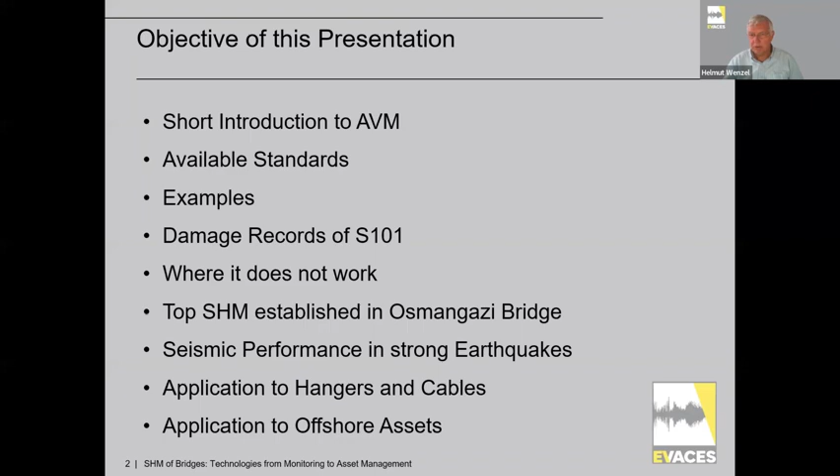Vibration-based analysis or assessment has a long history. Already in the 1850s, as far as I understand, some theoretical physicists were aware of the information that you can get from vibrations and specifically ambient vibrations. So what I want to show you today is a short introduction, very, very short, because I guess you know that. And I will have a word on available standards because this is important for practice, and then go through examples. I will talk about it as we see the slides. I'm looking forward to questions on that.

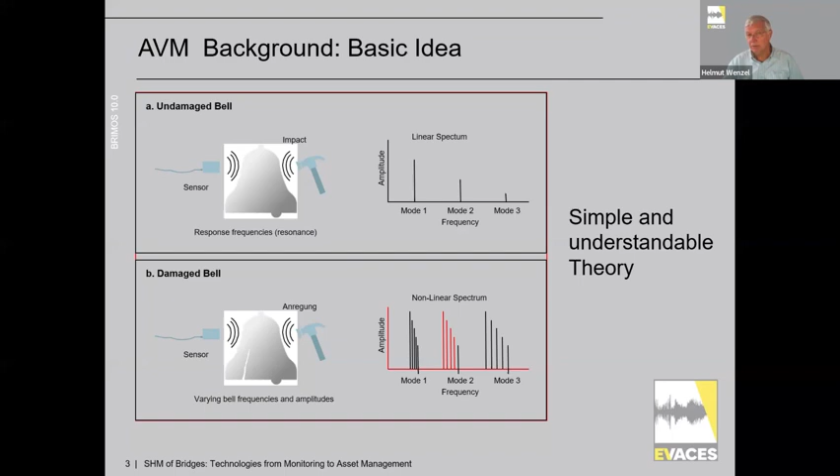The principle is very simple. The basic idea is if you have a bell, or if you don't want the bell, you can have a wine glass. If you impact it, you will get a sound back if it is a glass or a bell, but you can get vibrations which are in a linear spectrum, more or less, a very good and clear spectrum. And if it has a damage, then you see it in the spectrum you compute from your records. The rest is seen in many publications, and you can read about this very carefully.

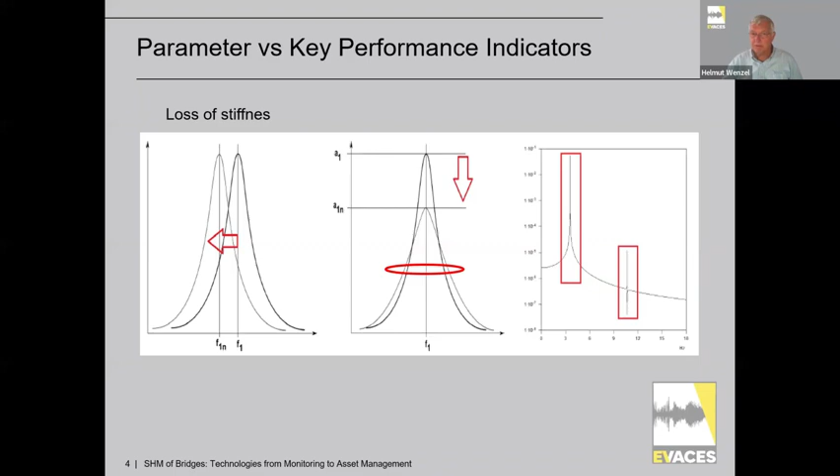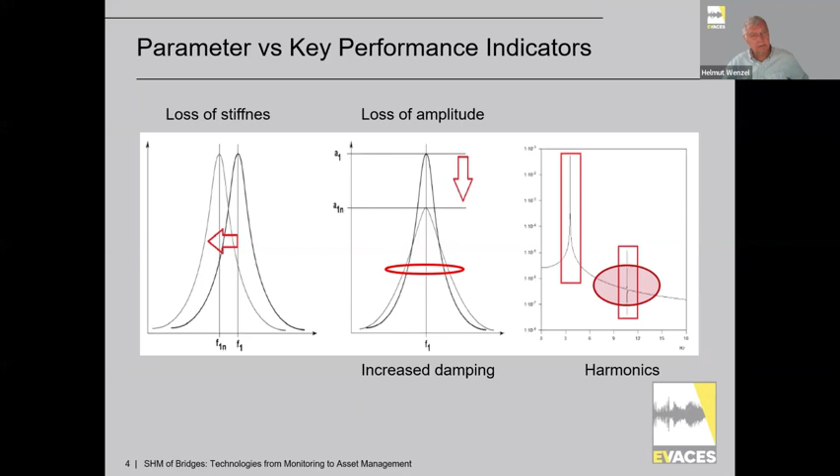We distinguish between key performance indicators, and there are only a few that are really important for us. One is the loss of stiffness, which is expressed by the reduction of the frequency. Another one is a loss of amplitude, which is more or less driven by damping. And if you look here, you see out of that you can read a lot of things. And then you have the harmonics and all the related information with that. I don't go into details of that. It will be more important to talk about some examples. We did a lot of very good experiments more or less all over the world.

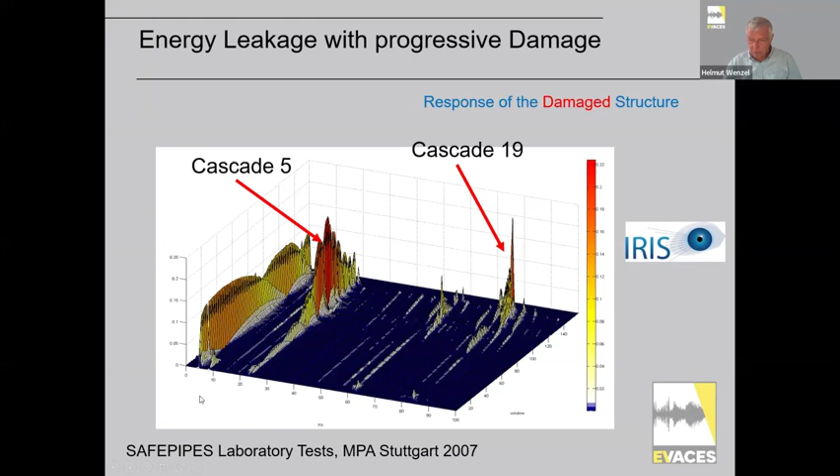This is one experiment from Stuttgart, where a pipeline used in a nuclear power plant has been excited and vibrated until it died, more or less. And what you can see here is the end of life of this pipe. On the left side, you see the frequencies when there is no damage, and then it starts to develop damage. You have a cascade 5, which means this is in the 5th mode. And later on in the 19th mode, you can see heavy excitation. So this is the indicator that there is something wrong. You can find all this in the publications about the IRIS project.

What is important is, first of all, we have to know the physics behind it and understand the science. But later on, to sell it, it is important that we have something to give to the clients, potential clients, to show that these methodologies are already well developed. And we were able also, as one of the products of the IRIS project, to bring the methodology into this Eurocode. Eurocode 16991 went into force in 2018.

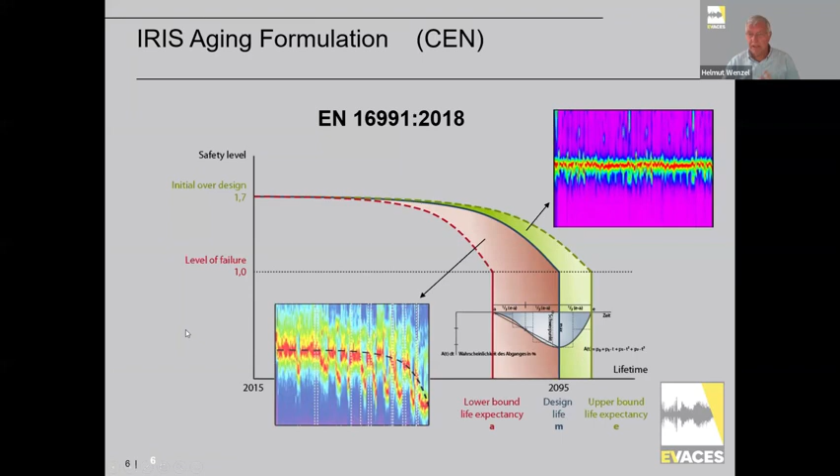And you can see if you monitor a structure, then if your record is straight like this, you are here. If your record diverts like this, it is here. These are the records from the example I've shown you before. So this is only the proof of concept. But if anybody asks you, which code are you following? Yeah, you can quote this code. This is very helpful for selling these things.

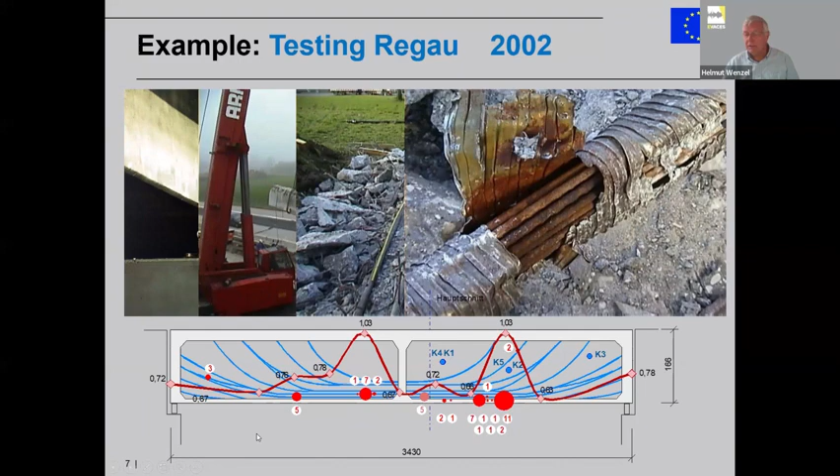Then a few key projects where we have tested structures where we knew that there are damages. So you can see the corroded post-tension cables, and here's a number of wires involved, and so on. This was a destructive test, but here in 2002 already we were able to show that even if you don't see anything, you put your sensors on the plain structure, you can find where these places are due to the indicators, as we can show in this line. Still very difficult to convince the client about it.

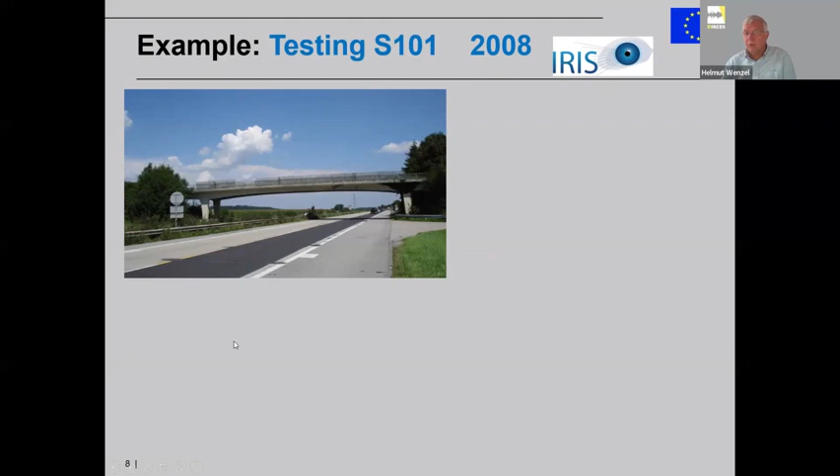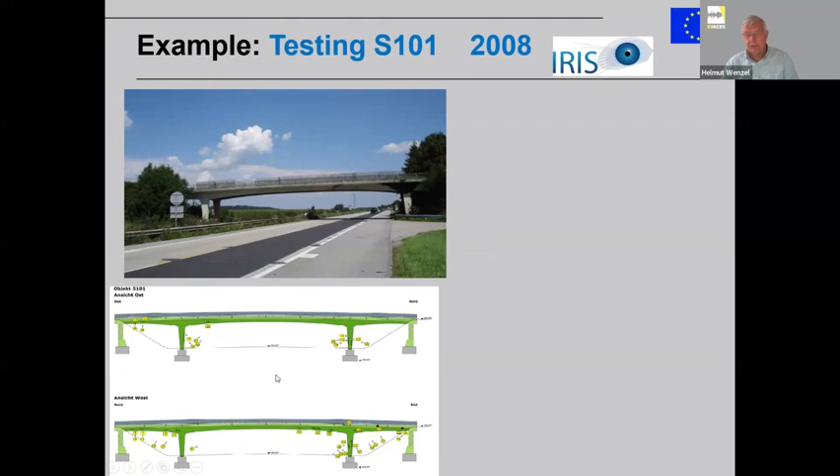And then came the S101 test in 2008 in the IRIS project. This is a bridge which was constructed in the 1960s and had to be replaced because of loading issues and other issues. A three-span frame, and this was a rare case where an owner allowed us to damage this structure artificially. And in this campaign, we got wonderful records about damages.

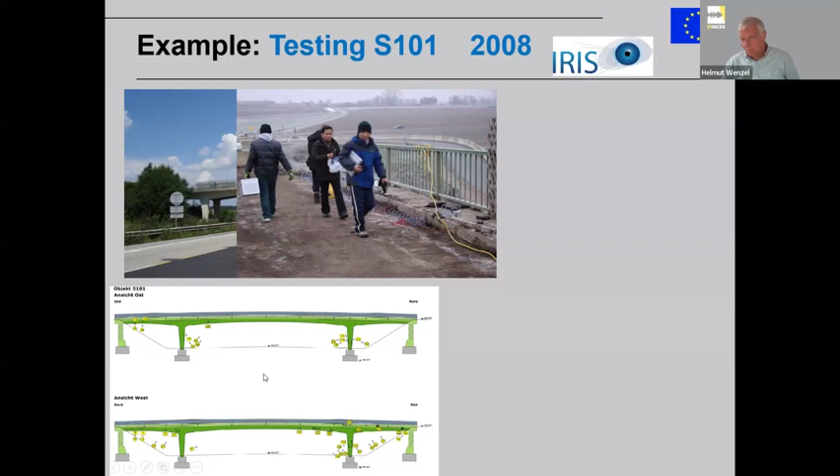For example, cut off a post-tension cable, cut off a pier here and lower it and push it up and such things. And all these cases are very well documented. You can still ask for this data. About 1,000 requests have already been made. Since then, we are still offering that free of charge to everybody. And this is more or less the record we received.

This is the structure in good condition. This is the structure with the damage of one pier. And this is a structure where we cut cable by cable until it failed. So you can have exactly these data you have here. You just let me know, and we will open it to you.

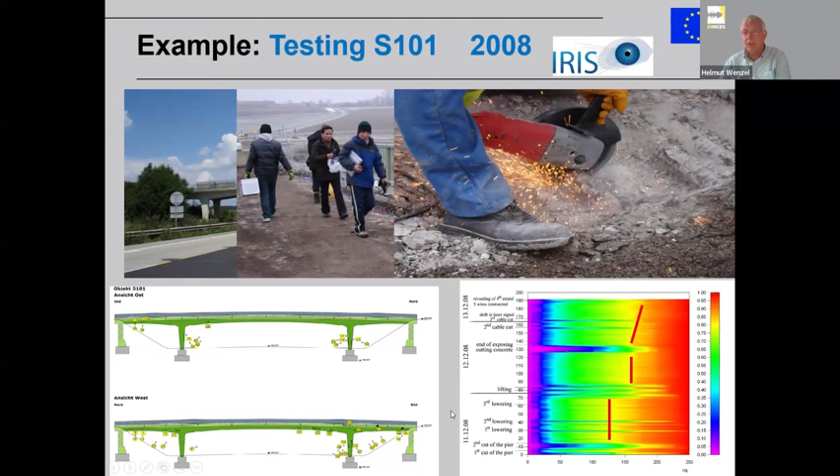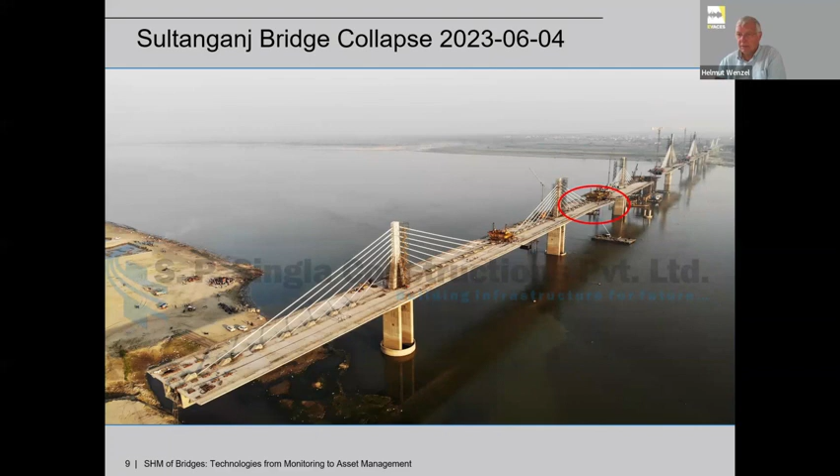Now to examples, or to things which might not work. This is a project in India where I have been involved in the cable-stayed construction here, and these are the access bridges, both sides. And what you can see here, if you look closely, is that the bridge should not deform like this. You can see a heavy lifter equipment in the beginning, and this is not a real case where ambient vibration would help you, but at least a proper monitoring would help that you do not have a deflection here of about 1 meter at 145 meter span.

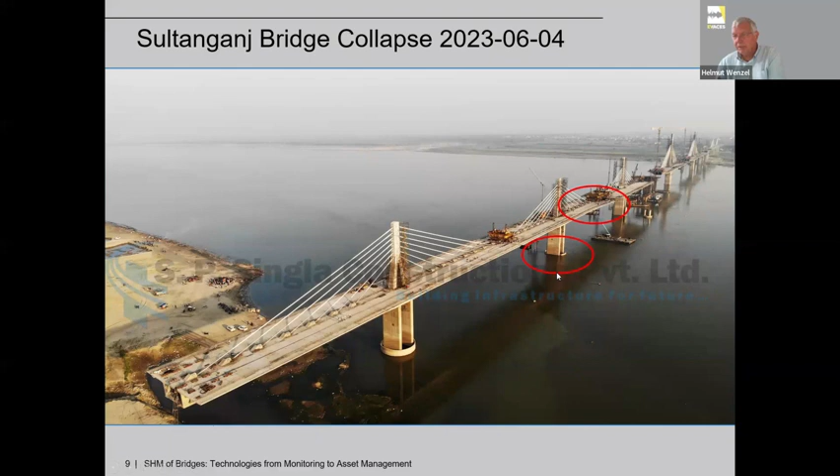And on the other side, if you look to this project, you see the ring here. This is the foundation, and the pier should be in the middle of the foundation, and it isn't. I know it's difficult to make foundations in the middle of a wide river, but if you have this, this weakens your structure. So what happened there was this.

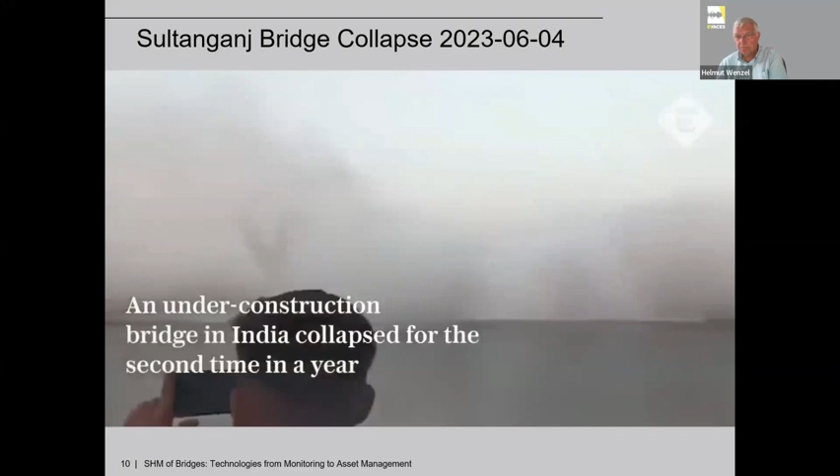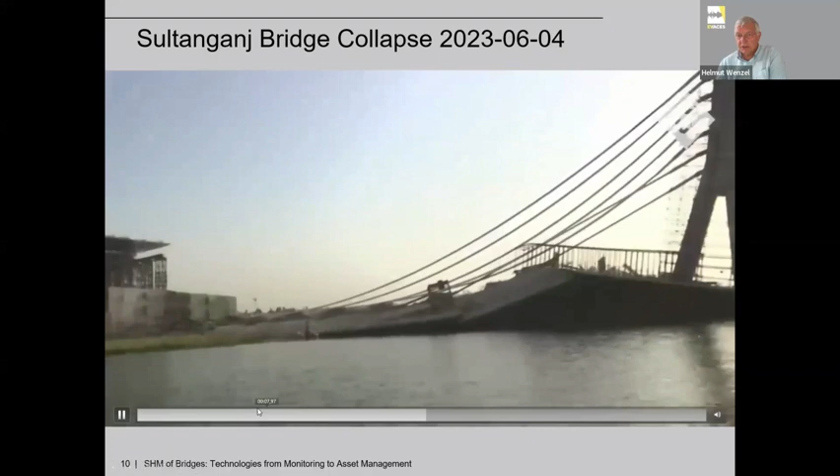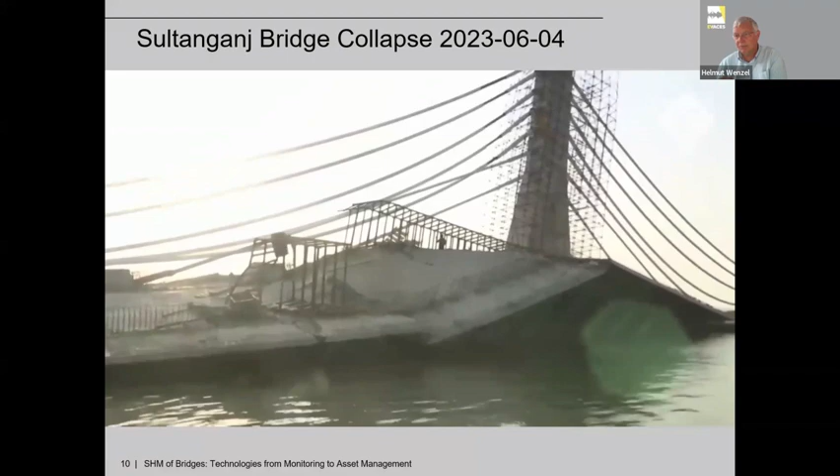The structure was not instrumented at that time. It was early morning. There was nobody on the structure. Nobody heard. One lesson learned was that most of these cases happen in the early morning because the stress from temperature differences on the structure itself is higher than anything else. So these are the good news. But what we have learned is that things like this are very well hidden, and the lessons are not learned, and there is no monitoring system to really show deflections which should be there. Of course, in the specifications you can find it, but it is rarely done.

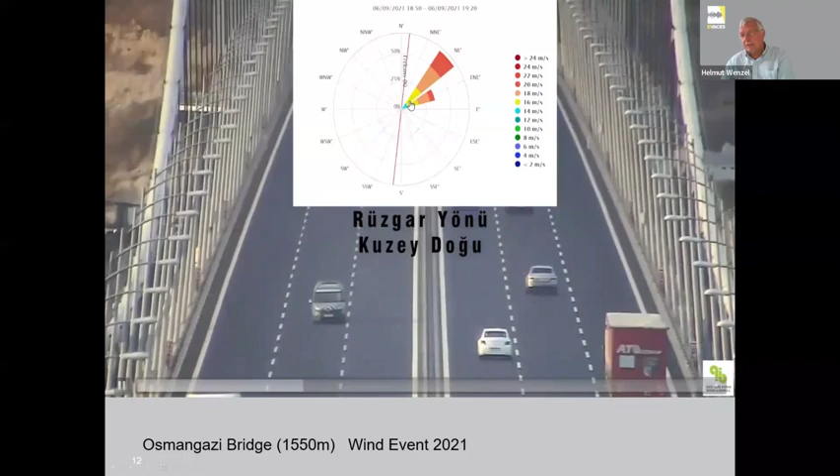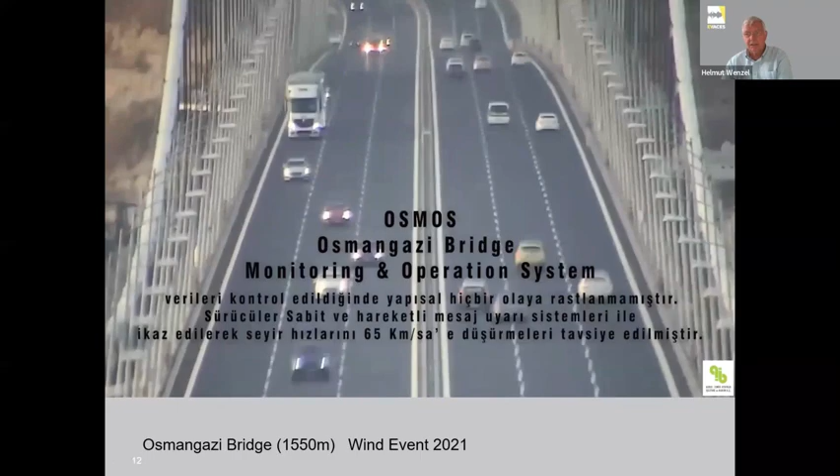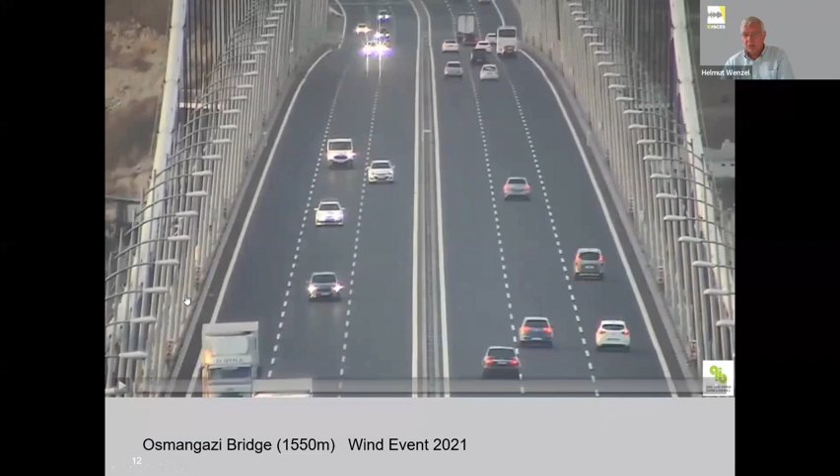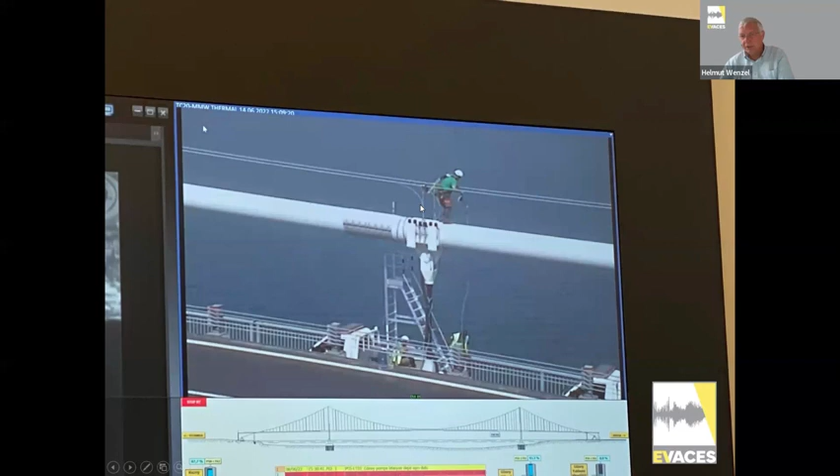So we came to analyze the structure and find out what the real behavior of the structure is under, let's say, almost normal conditions. 20 meters per second is still good for traffic, and this is of concern. So what helped here was an ambient vibration monitoring campaign. You can see here a typical Kinemetrics sensor on the cable itself to find out what the frequencies of the structure are. We did this in several places. This is from the video, also the monitoring at midspan.

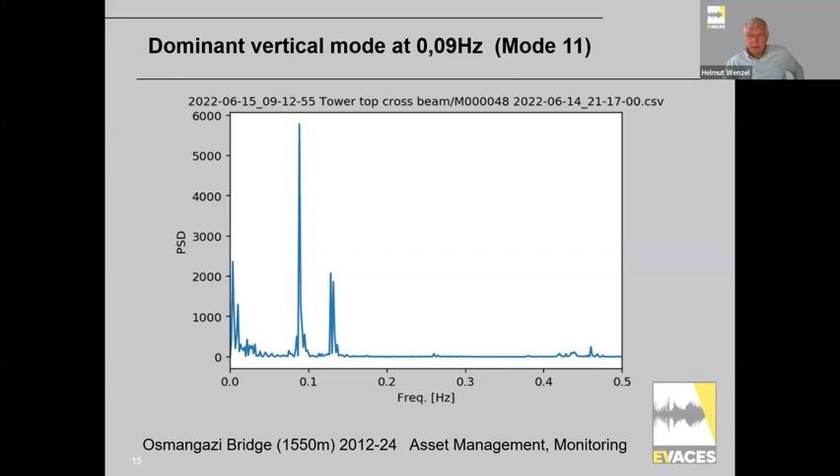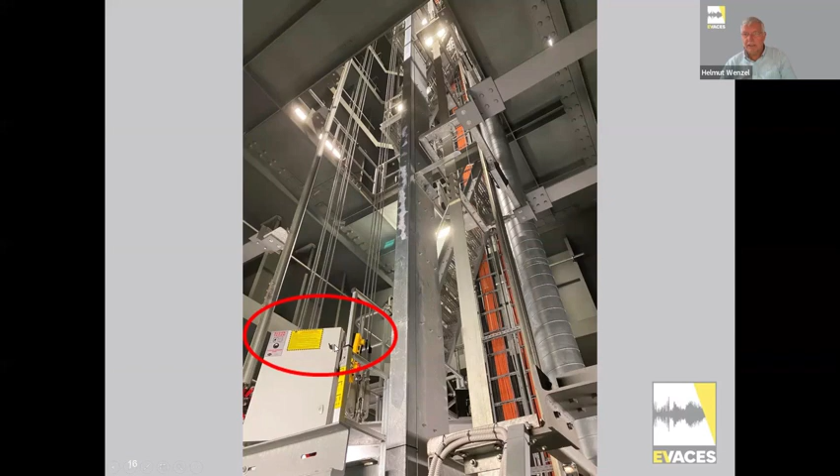Our main finding from our ambient vibration monitoring campaigns is that in almost all cases we have a major difference between design and reality. But normally it is on the safe side, so the structure is behaving better and not worse. This is inside the pylon, the huge structure. You can see the elevator, and the only damage the bridge suffered from this event was to the counterweight of the elevator. The pylon is 250 meters high, so this is a real big elevator. It was pulled out of the guides, and it destroyed some of the structures because it worked like a pendulum because of the pylon action.

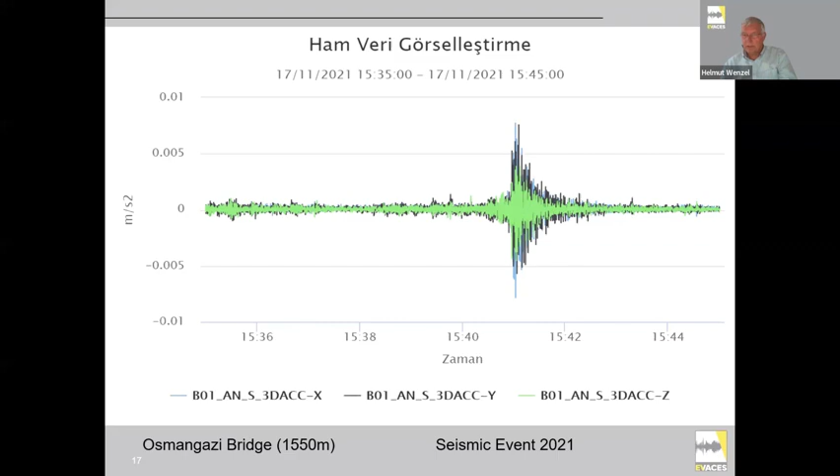This was a little bit surprising, and we also had to look into this thing. But what we found was, it is always interesting in the big bridges that you do not only do ambient vibration, but you also put some displacement sensors, particularly where you have expansion joints. And this one recorded after this small earthquake a permanent displacement. One side was the main bridge and the other side was the access bridge.

It is not critical if you look at the values, but at least you can identify weak points from that. So this is very helpful. And here we have an extremely good client who is aware of things that you cannot judge just by looking into books, but where you need some monitoring, and you have to analyze it, and then you can conclude on the consequences of events.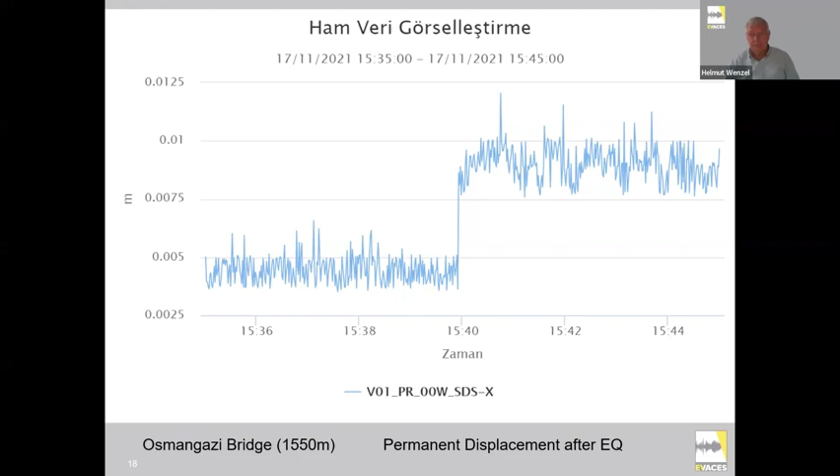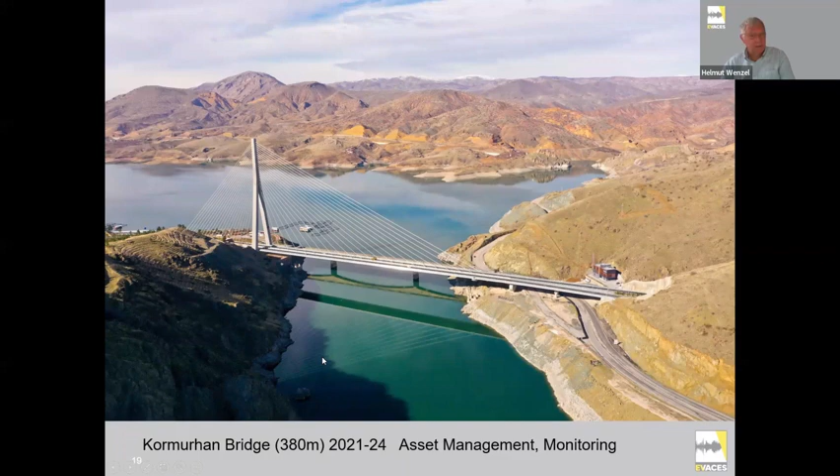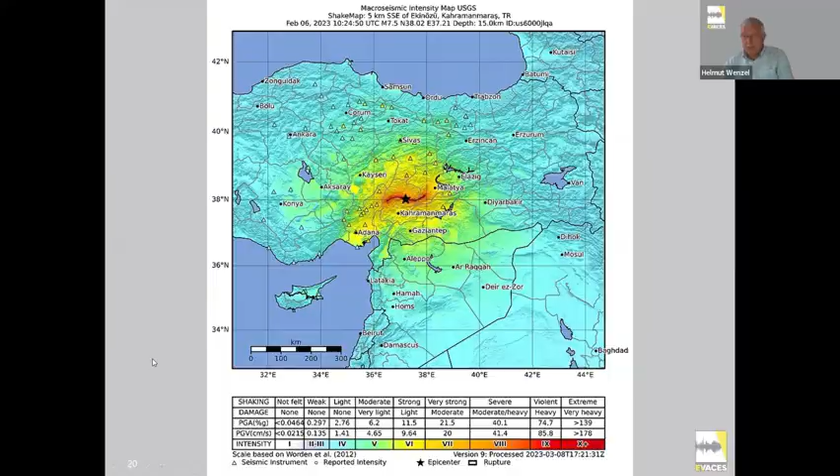And there were two earthquakes, actually, of about 7.8 and 7.5 magnitude on 6th of February 2023. This was 7.5 with this epicenter here, and the bridge is here, close to Malatya, about 150 kilometers away. And 40,000 people died in this terrible earthquake event. This is a look at the monitoring system we have installed there.

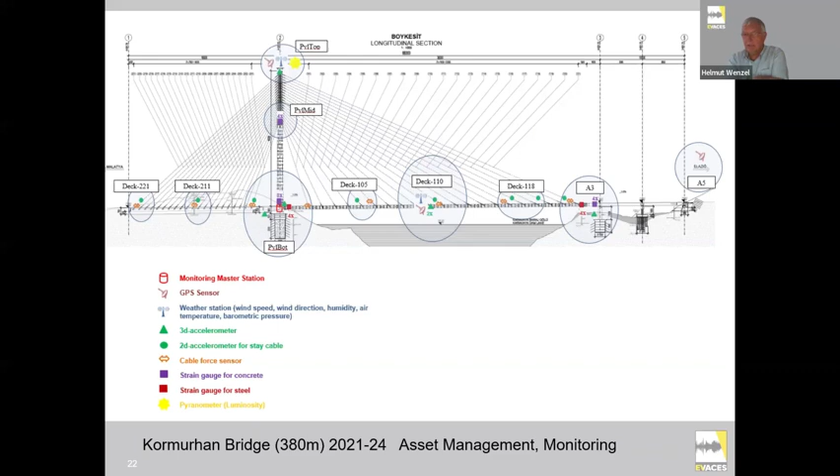So usually it is very helpful, in a first stage of monitoring, if the bridge is new and there is no doubt, you should not have a too big monitoring system. And actually, the most accurate, the most interesting information you get from ambient vibration monitoring, where you have accelerometers and a few others. Of course, you need temperature, you need the wind, and all the other things from the weather around it. And it is always advisable to have some displacement sensors where there is a movement between the structures.

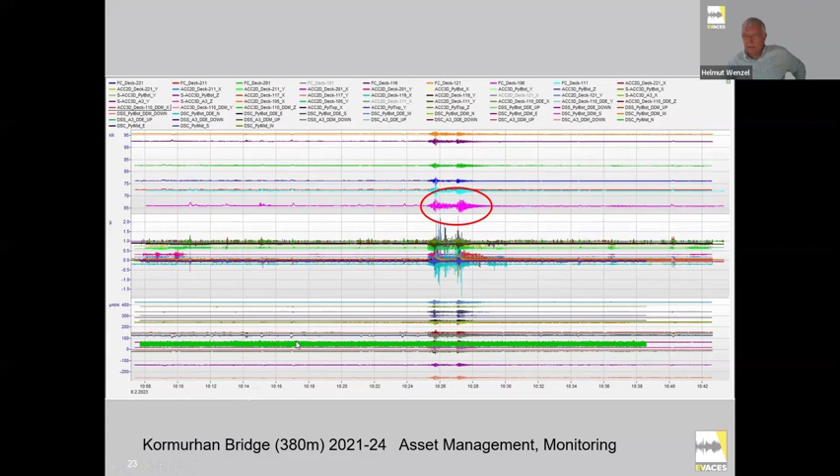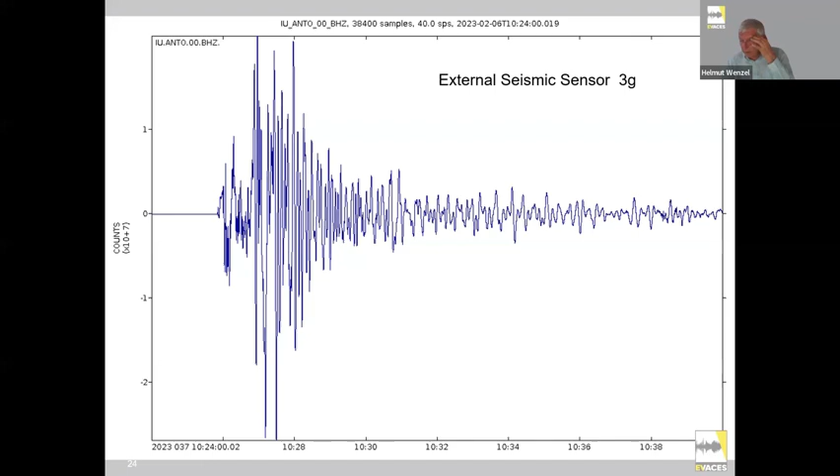And the excitation to the structure, this is a record from the nearest seismic station, and the maximum was 3G. So you can see this record. This was the start, not the full record. There was another record after that, but this is the most interesting. So 3G is something we have not seen before on the structures. Anyhow, it is obvious and also clearly understandable why bridges with long spans are not so vulnerable, and that if you have damage, then it is the smaller bridges.

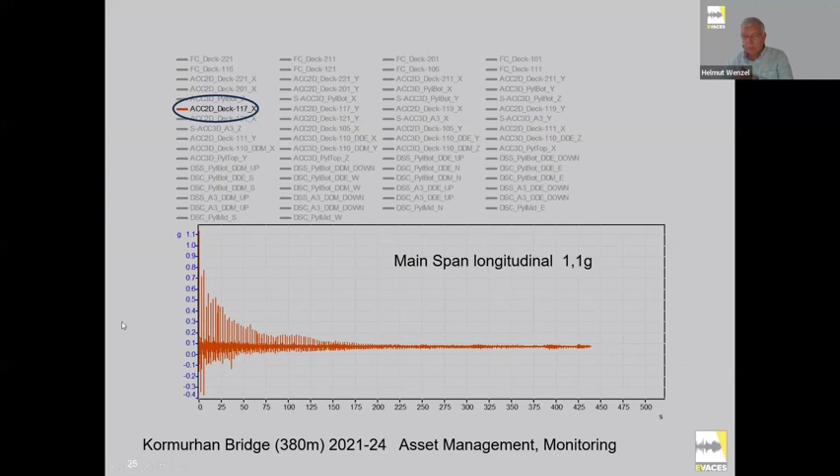Then we had to look at the deck. What did the deck do? So this is this sensor here. X means this is a longitudinal channel, and it is clear when you look at where the epicenter was that the X direction, the longitudinal direction of the structure, will be the main excited, 1.1 G. This is by far much more than the seismic design spectrum was demanding. Anyhow, there was no damage to the structure, and nothing we really had to do or change.

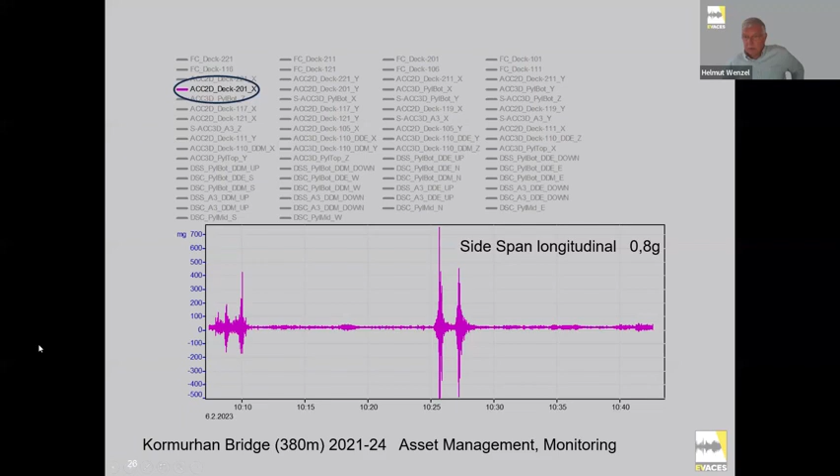The first one was the main span. The main span is a steel structure. The side span is a concrete structure. It's an asymmetric cable-stayed bridge. To balance it, you have to be more heavy in the side span, and in the side span there was still 0.8 G found in this huge concrete block, and also it is sitting on bearings, and these are seismic bearings which are able to carry that, and the bearings were not damaged. Nothing had to be exchanged.

On the main span deck, Y is a vertical acceleration, and the vertical acceleration maximum was 1.3 G, which is also much more than the code was demanding. And the bridge end is sitting on spherical bearings, and also these bearings were not damaged. Even so, we have to think that the structure must have been lifted by that.

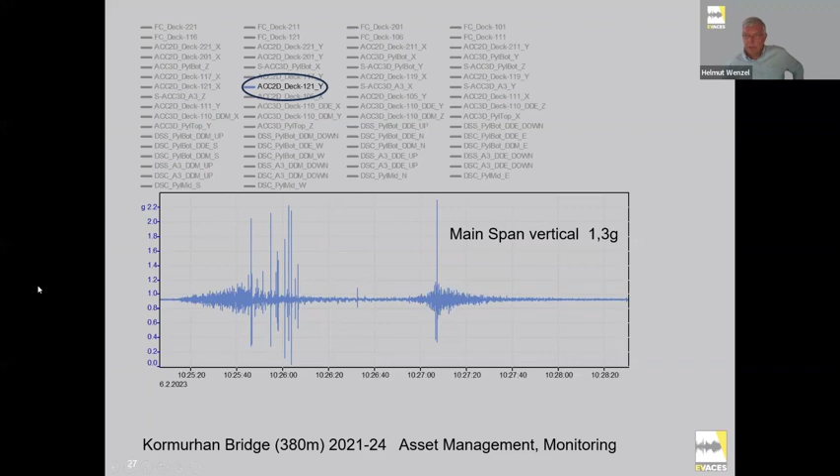But this was not the reaction of the seismic shock itself, but it was more related to the cable vibrations we have seen there. In the cables, this was a cable close to Deck 119. In X direction, so this means in longitudinal direction, it had an acceleration of 2.1 G. And you can see that there are a lot of harmonics going up and down. So we have good damping, but it is more or less running with this earthquake.

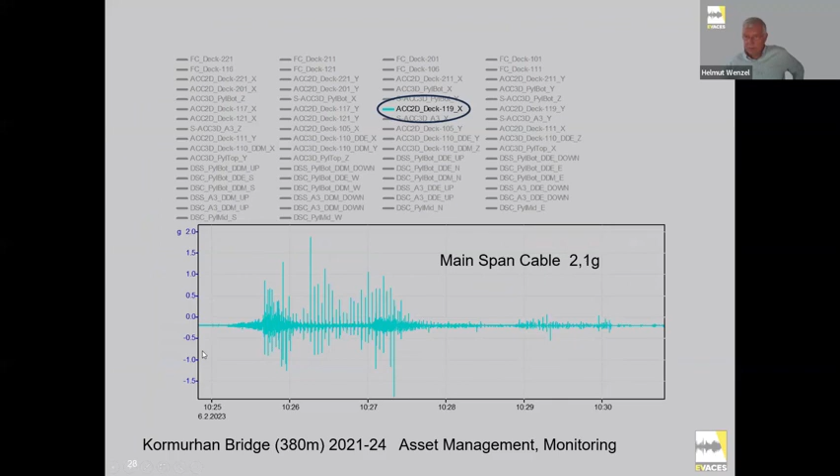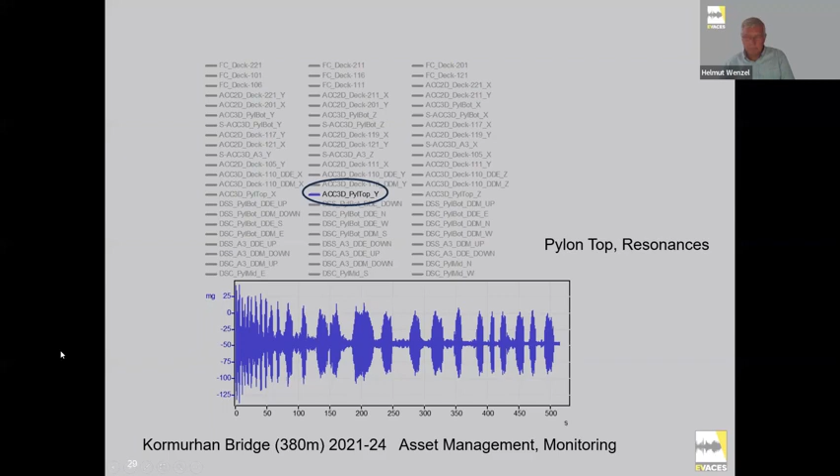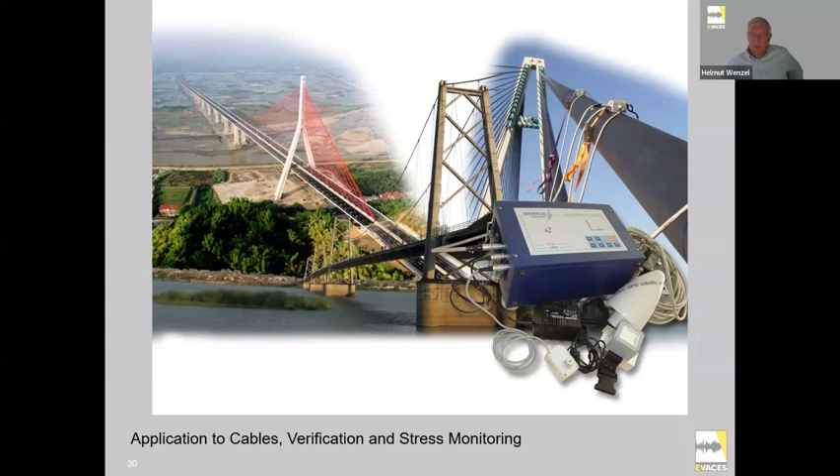So how is that done? This is a typical BRIMOS recorder on these cables. Normally it's very simple to place some sensor on the cable itself. If you want to have the cable modes also, then you need 2 sensors. And this is applied to almost 10,000 cables so far. Very reliable, very easy, and very quick to be applied. So you can find out a lot of things by that.

This example I have also shown before. I'll just give a short introduction. This is Godavari Bridge in Rajahmundry, India. This is southern India. This is a chain of 28 arches with 100 meter span each. So we have 670 something of these vertical hangers. The hangers are damaged, and some of them have lost their support.

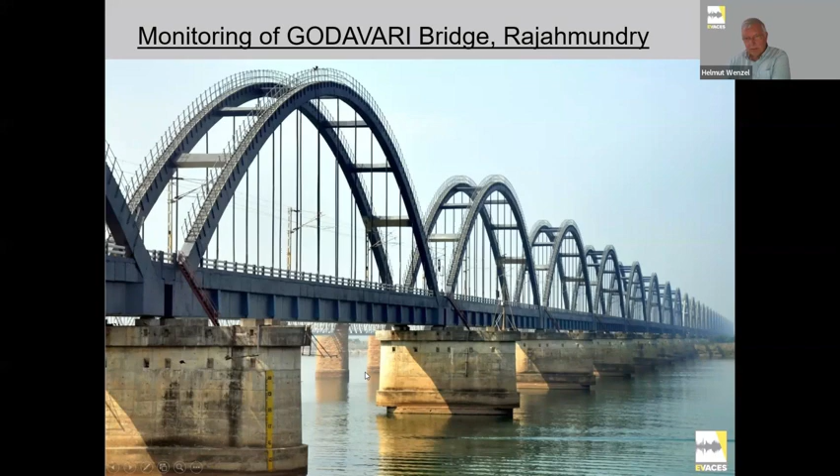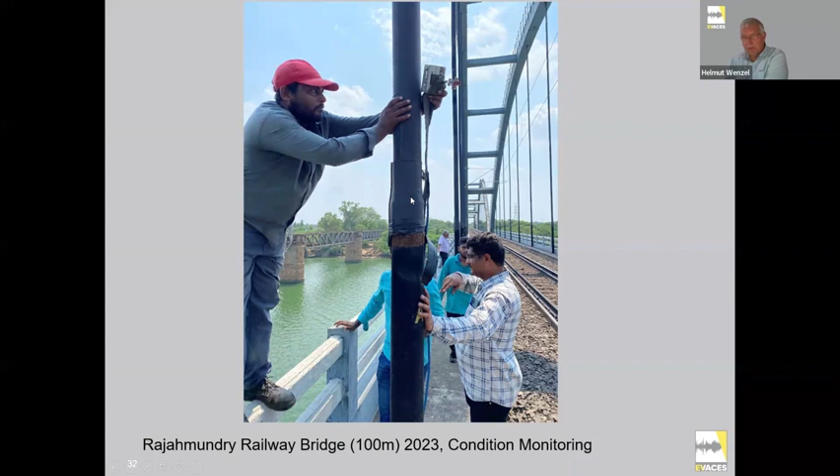So here, this is what has been done. The monitoring work can be done by local people. It's very easy to clamp a sensor here, and within 1 minute you get a record that shows you whether this hanger is working, what the force is, and what the condition is. You can see here that the condition inside of the sheath tube is not perfect.

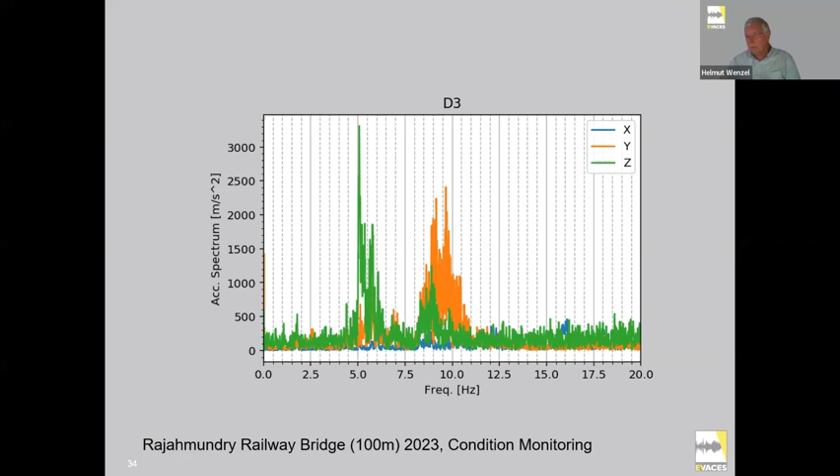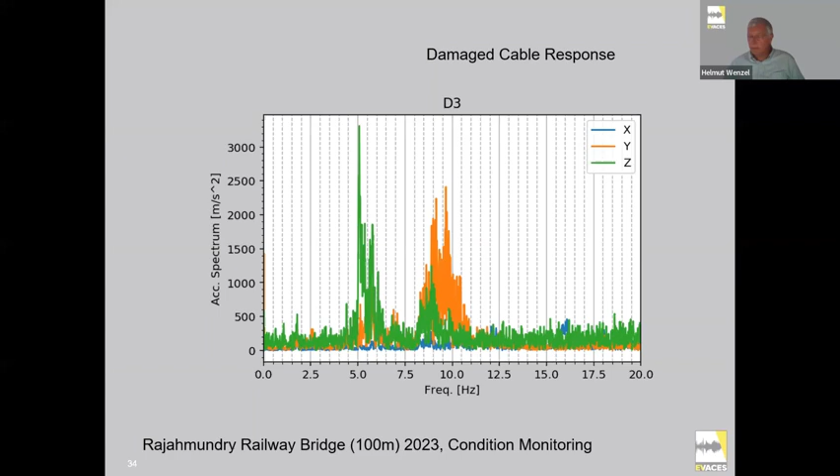In these vertical hangers, it happened that one of the hangers almost lost all of the wires. So this has been very simple. And normally we make out of that a kind of risk matrix, and show the client where the damaged cables are and in which sequence to repair them in order to avoid any problems during this repair work.

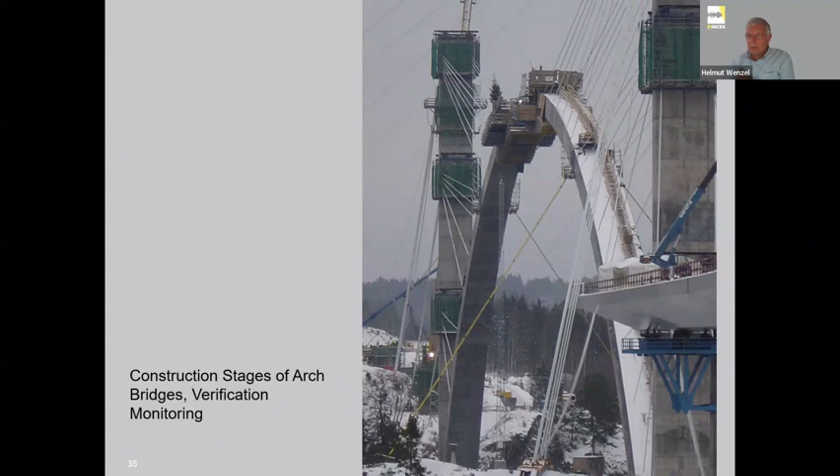A few other applications for cable monitoring is this one. If you have complicated construction stages where your hanger forces or cable forces are changing all the time with every construction stage and with temperature and whatever, this kind of thing is extremely helpful. In this project, we just left 2 of them, the BRIMOS monitoring systems, to the contractor, and they permanently sent data to see whether the construction finally achieves what the theory wanted. So an extremely good application.

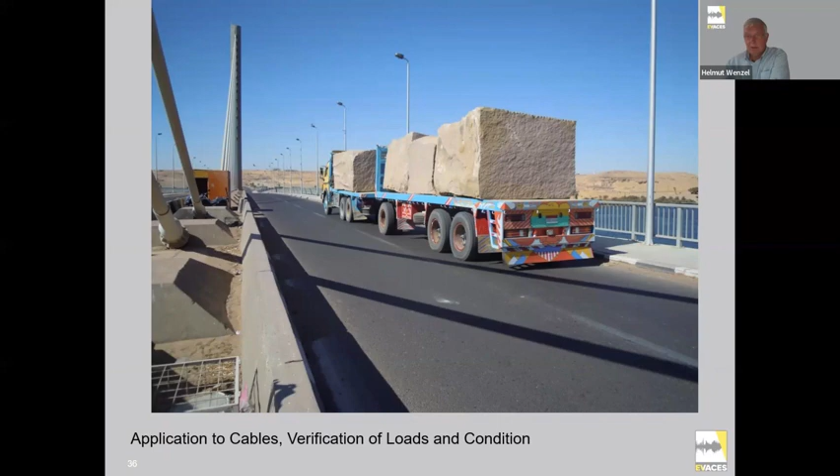This was a cold weather project. Here is a hot weather project. This is in Aswan in Egypt. You can imagine, I guess, that this truck does not have the usual 38 tons it should have, but it has about 120 tons on deck. And it was interesting to see how the bridge is reacting. But a big cable stayed bridge like this is not really harmed. What is harmed here is, of course, the asphalt layer, and the deck itself gets stresses which it is not made for. So also an interesting application and very simple to do. This is a one-day campaign.

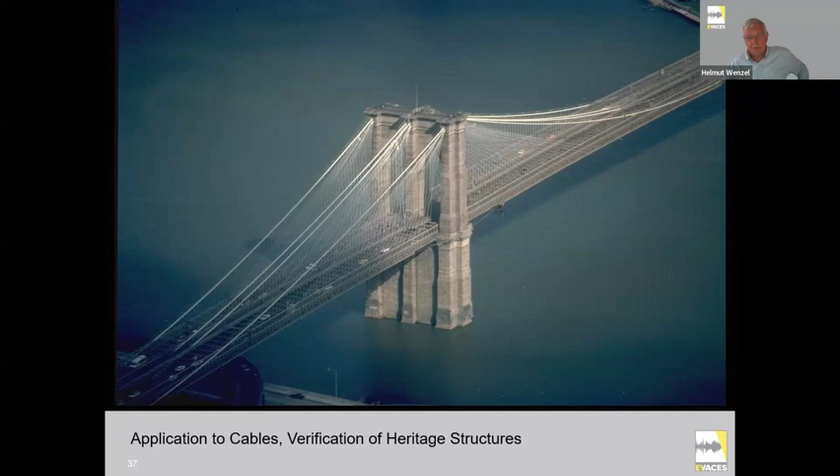But also here, within 1 minute you know what the individual cable forces are. The main problem is to keep all these records in a way that you know later on where it was. This is why the BRIMOS recorder, for example, has a GPS to know where the position of the cables was. It shows that this bridge is a fantastic concept.

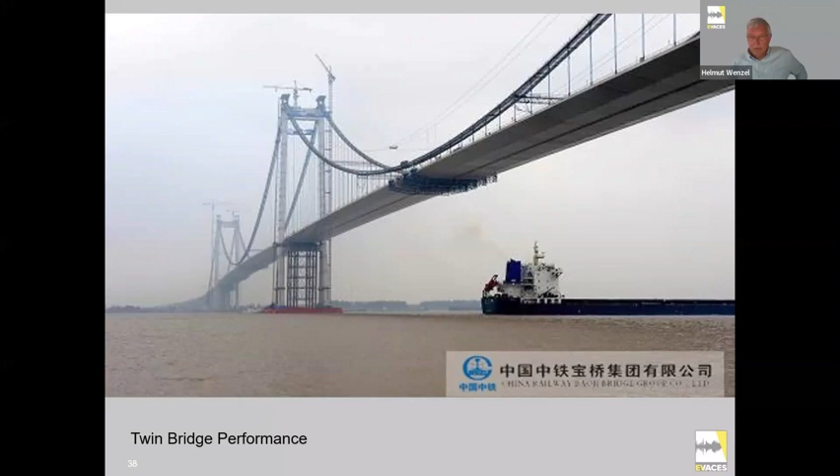In the end, it was closer than expected here. This was a little bit surprising, but I think our monitoring campaign here took place at a stage which is not too representative. So it would be interesting to know what a permanent system, if there is a permanent system there, produced.

There is earthquake risk. The bridge should be used later on by a railway. It's not yet installed, and the suspension cables should mainly take care of these additional loads. It was a very good application of optimizing what is the minimum, because on new bridges you're not looking for the smallest detail. You're just looking for the general performance, and if you have the global performance without any doubts, it is not necessary to have thousands of sensors.

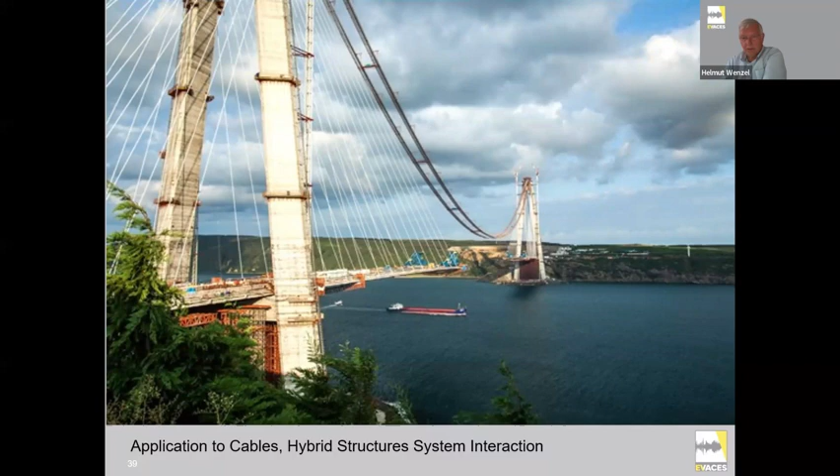Here we finally came to 78 channels necessary, which are in the majority vibration sensors. On the pylon, of course, inclinometers and the necessary temperatures and weather station. So this is sufficient. But the method can also be applied to external cables, post-tension cables, and whatever it is, and works very reliably. I won't say that there's nothing to do or to develop here, but it is quite mature.

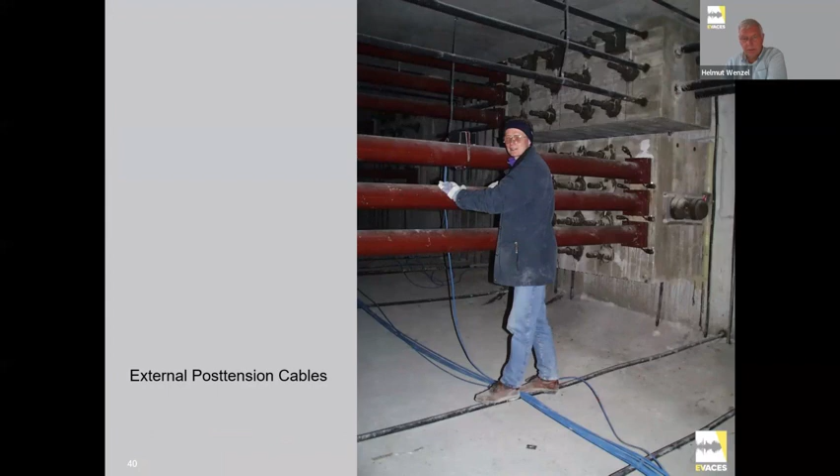What do you do? Because these are all new structures. So we are not looking for the typical damages that occur in old structures, but we have the possibility to find out any deviations. The good thing is, such a wind park consists of between 50 and 100 windmills. And this means you can always compare, because water depth is almost the same, the structures are the same, conditions are the same. So this is a very interesting thing to use also for AI.

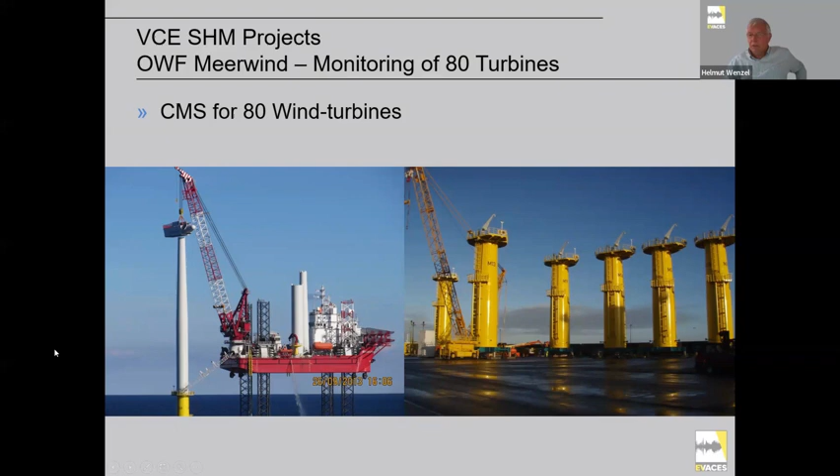It is not AI. These are parameters and things we identified already before, and we have our routines that we called algorithms before, and AI is nothing else than such an algorithm. So what comes out from that is we have done a lot of instrumentation of the windmills, where you can put the sensors, as you see on the right side, before they become offshore, and then all the construction stages can already be recorded. Currently, there are more than 800 of these structures already instrumented with interesting data. Unfortunately, they are not freely available.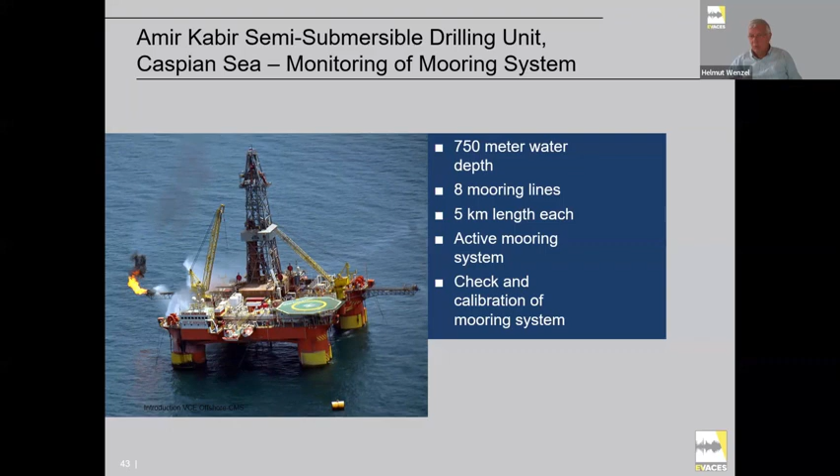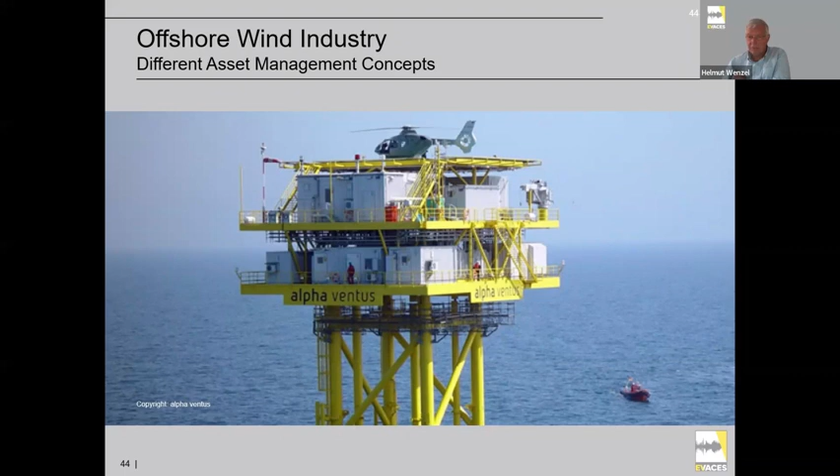And finally, more or less, platforms are the interesting thing, because some of the platforms are inhabited. Not this one. This is the Alpha Ventus. This was one of the experimental platforms in the North Sea from Germany. But on the big platforms like this here, there is a hotel on there with about 60 rooms. So this is a huge structure.

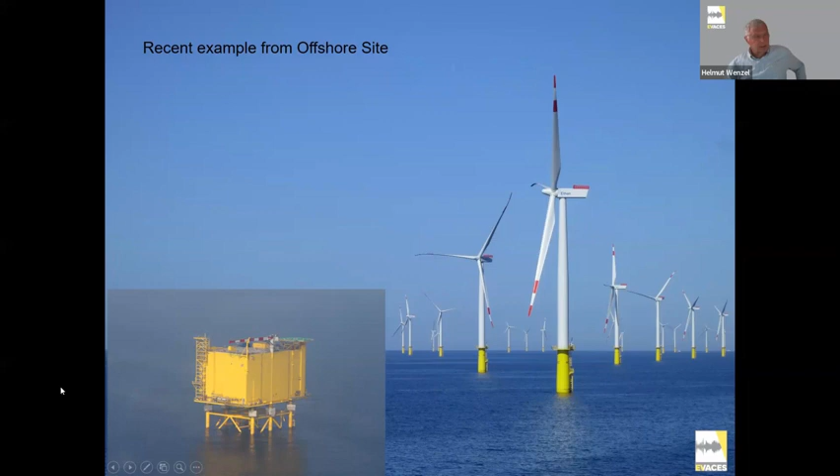And it takes the record from 80 of the windmills, then converts into certain currents, and then transports the electricity to shore. The dimensions are enormous. What we found there was on one of these platforms where people complained about seasickness. So this means the platform is vibrating in a mode which is uncomfortable. Then we were asked to monitor.

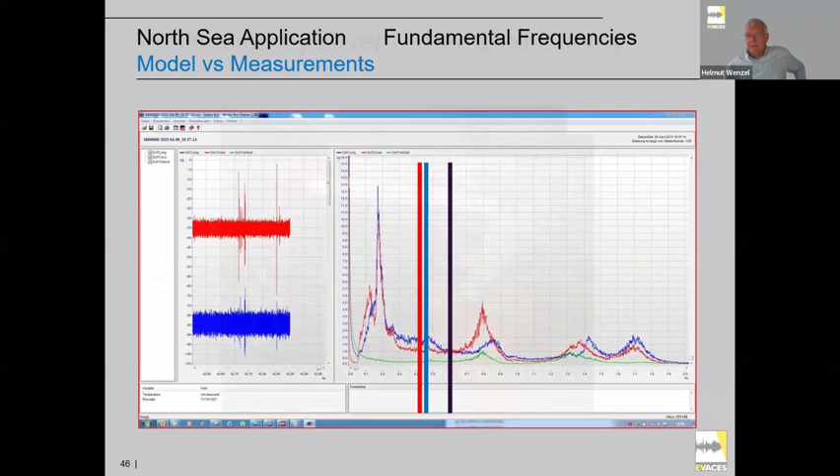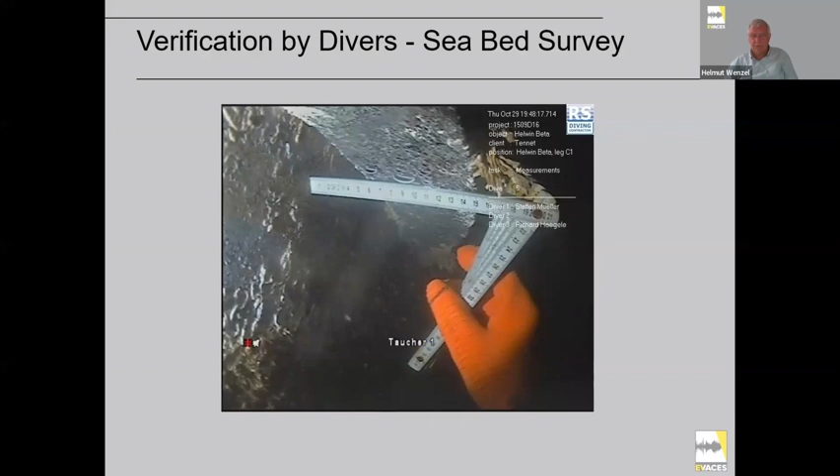It was not a design mistake. The design was okay, but in the execution, something went wrong, and the fixation that should have been there was not there. This has led to the situation that you get, you know, this would be the platform. This is the structure which goes from the platform to the seabed. And then you have the piles below. This is the mud line, the brown thing, about 30 meters water depth. And we have to consider a scour, of course. In the North Sea, currents are very heavy because of the tides there.

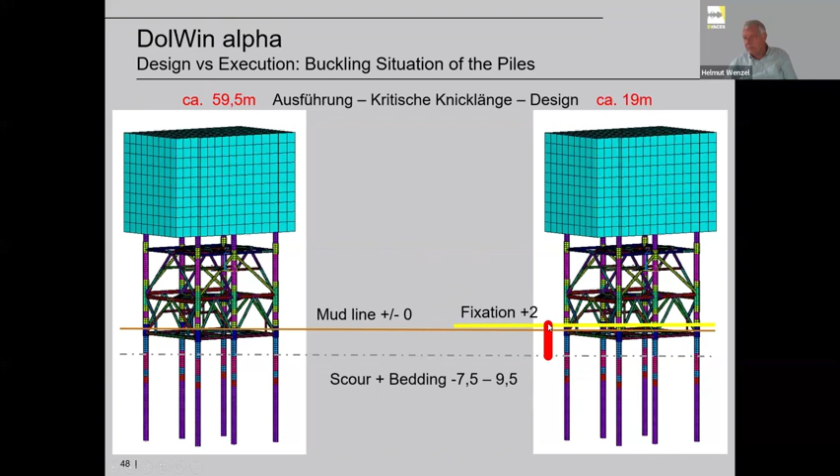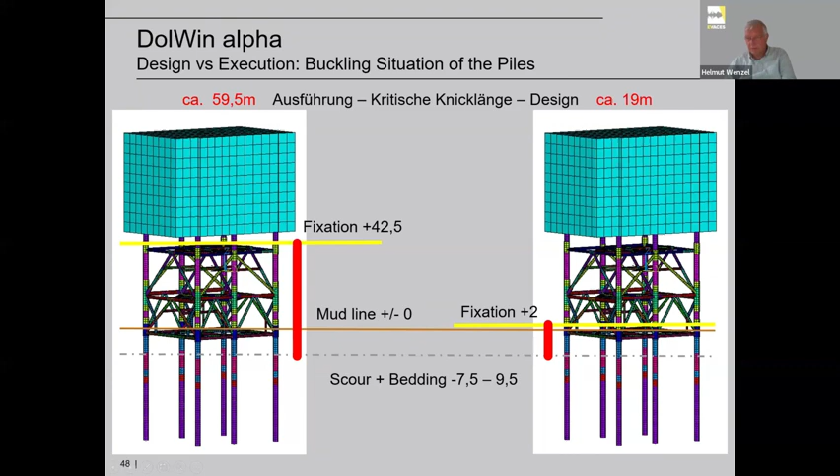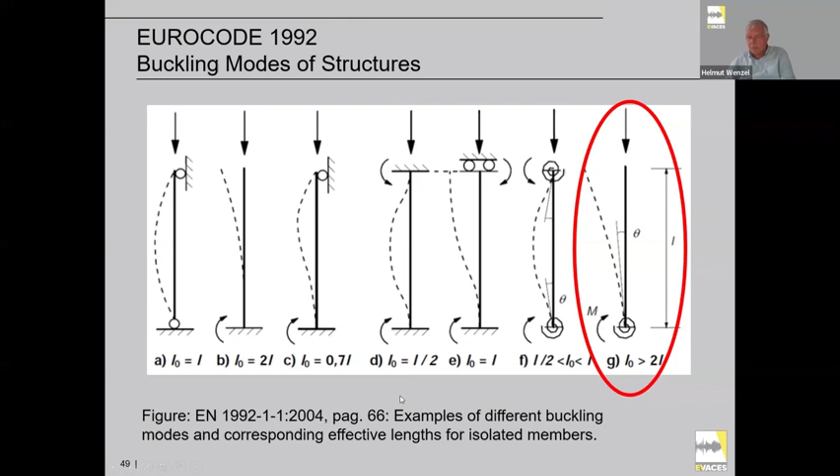And when you look at the fixation, which should have been there here, then you see that there's a buckling length for these piles of that one. I don't want to go into the figures, about 19 meter. But finally, it turned out that the fixation was only here, no fixation down there, and you get a buckling length of 60 meters. And this is not trivial anymore. And in the end, you know from Eurocode how to treat buckling, and it is a very, very uncomfortable buckling case you get, and the structure was theoretically not safe anymore. It has been mitigated in the end.

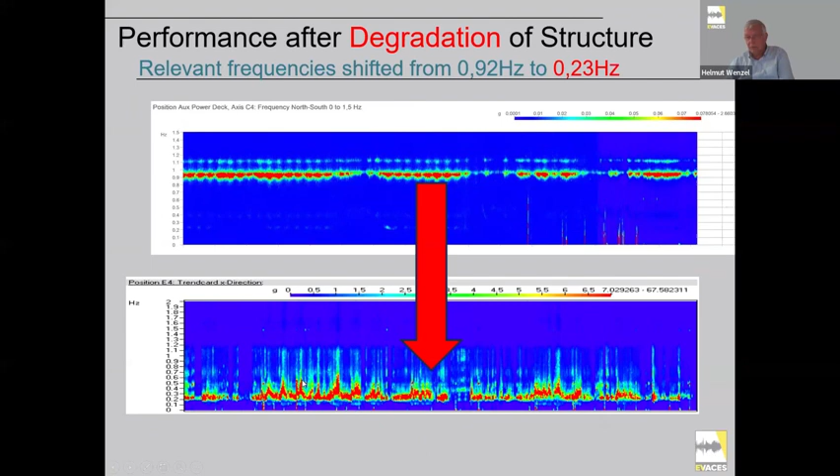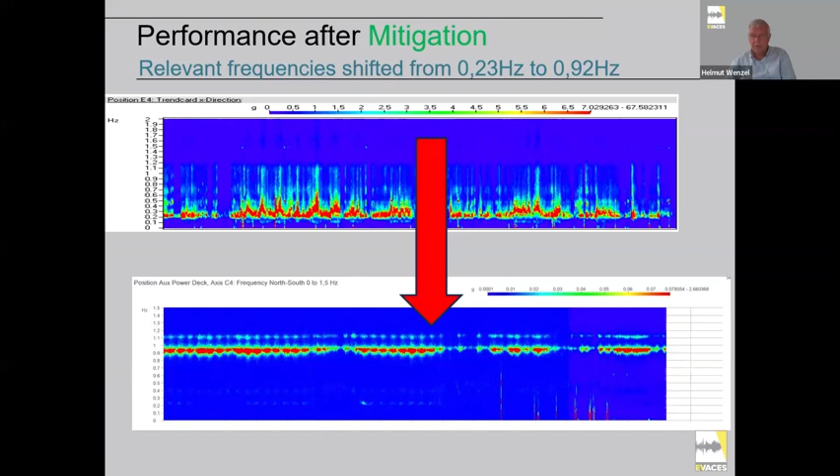This was the desired performance, and this was the actual performance measured out there. So it really went wrong, and finally it was shifted from here to here, and there are interesting records during the mitigation process. So this is one of the best examples we have made for ambient vibration monitoring, and right now all the platforms there are fully instrumented to find out if something like this happens.

So finally, in summary, the ambient vibration method is mature, and it is applied worldwide and commercially. So it is not just done for fun or for scientific work from universities. But what has been learned by the industry was that monitoring alone produces just data, and this data means nothing. You have to have, after that, system identification, and this has to be simple enough that operators, who in many cases are not engineers, can understand when they have to call the engineer. And finally, to combine it with a risk management, so somebody has to give a threshold whether things are going in a very dangerous situation.

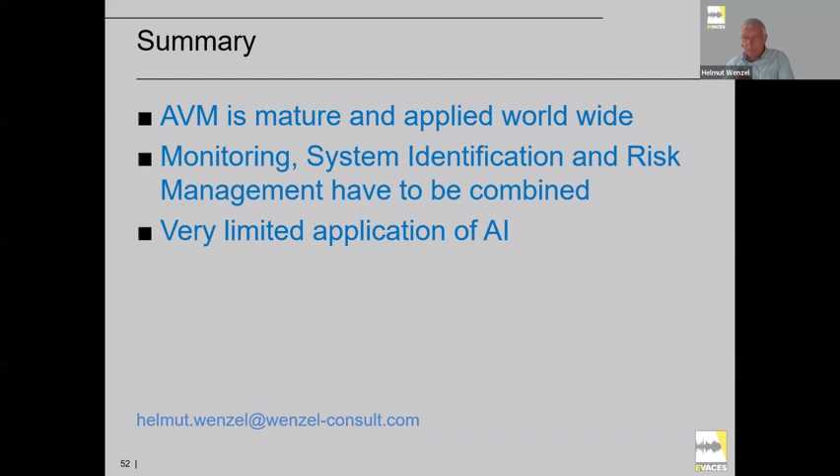I told you already there is very, very limited application of AI yet. So there is a wide field of science and development work to be done to make it fit for the applications. And interdisciplinary engineering is required, which is still a problem. You have to put all the disciplines of engineering into one pot to find out the right solution. Anyhow, I think there's almost no problem that cannot be solved by ambient vibration monitoring. And when you have detected the problem, then you normally get enough money to do some very dense sensor network, and then find out where is it, how big is it, and what to do.